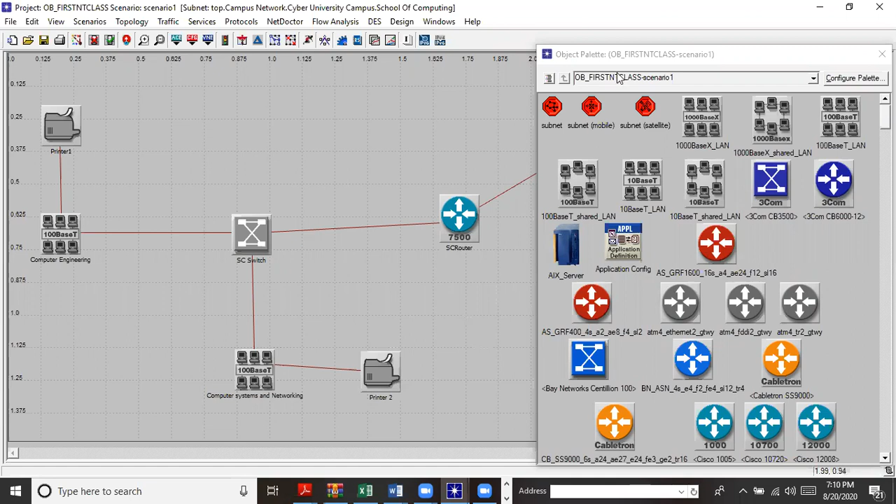So I said we are going to add servers. I'm going to put one server in each subnet, and we're going to put all the servers, meaning if you've got 7 applications, we're going to have 7 servers. In IT, these other applications access applications remotely, but we can have the database local. Database will be local, and print will be local, and the rest will be accessed remotely.

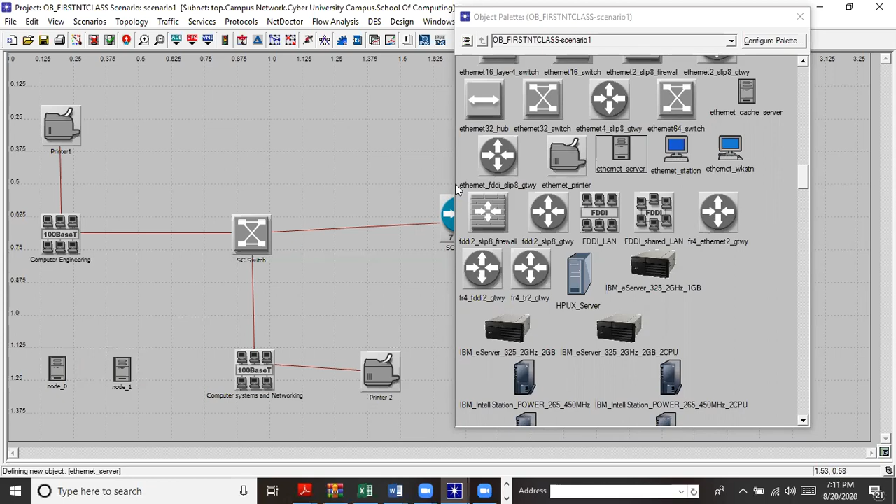So let me put the Ethernet server there. I'll put 2 servers there. Then even here, I'm putting 2 servers even there. In IT, I'm putting 7 servers. 1, 2, okay, like that.

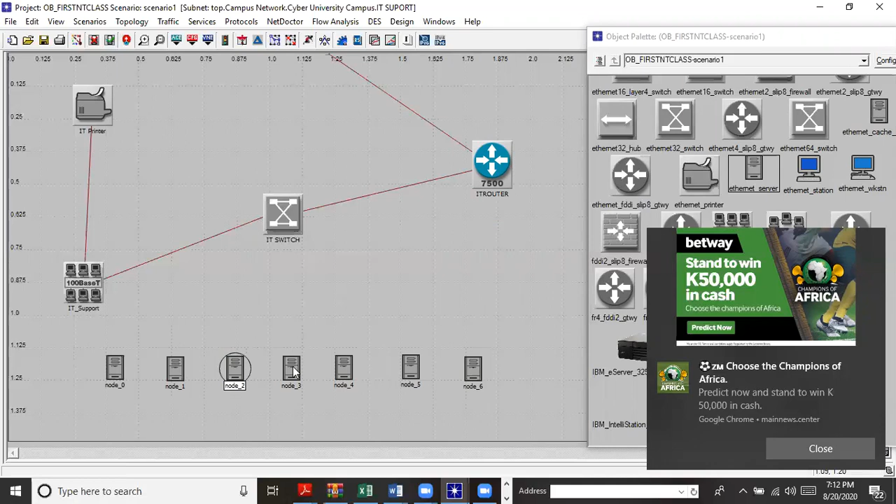Mr. Brian? Okay, so what if in the coursework you have one server and then you've got, let's say, virtual machines running just on one server, but you've got many virtual machines running on it. Is that still possible in the coursework, or would you have to have separate servers for each service?

No, it's up to you, because we've got bigger servers where all the applications can be configured. But we can argue, what if this one server fails, meaning there will be no applications running? The fact is we know there are bigger servers using redundancy, even power supply, isn't it? Yes, they'll never be off.

So it's okay, you can put one if you want, but you justify that this server is on redundancy, so they shouldn't worry that it is down. You can never not have redundancy. Even the links can be redundant. We'll talk about all those.

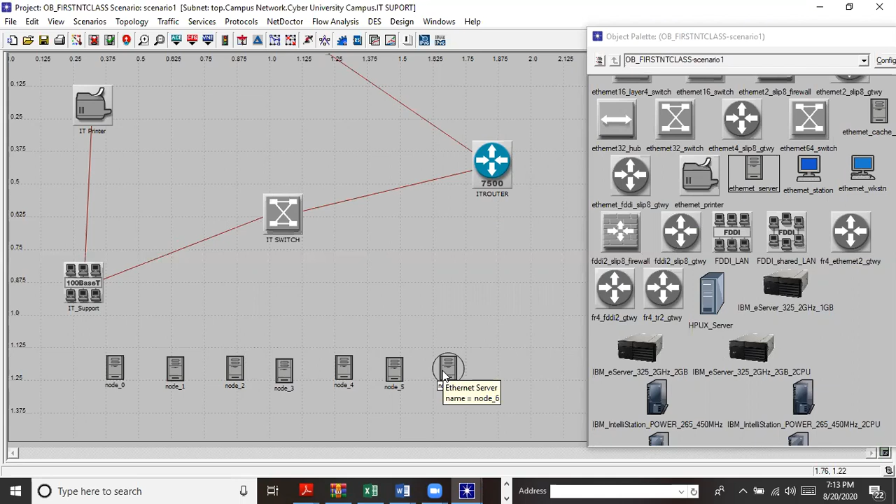Okay. People are submitting to NCC, they are submitting assignments. No wonder they are calling a lot.

Okay, so I just wanted to show you this other way, but the easiest one will be you just put one server and all the applications will be configured into that particular server. But personally, I can say I'm not going to have one server because of this. You give reasons, you need to justify your design. It is your design, so you need to justify it at the end of the day.

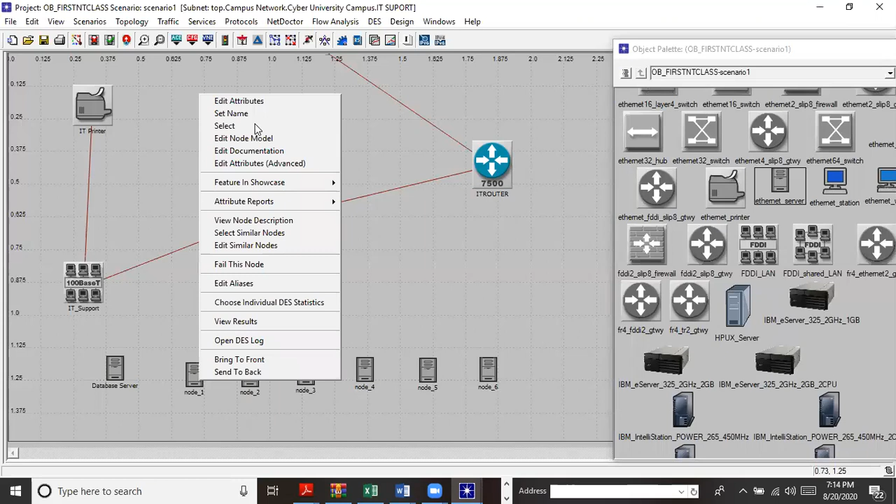Okay, so I'm going to rename these servers. This one will be database server. Then the other one is email server. This is FTP server. Print server, voice, then video conference, then telnet. No, this one doesn't need a server.

Okay, so these are the servers that we have. The design is yours, so don't worry how the arrangement will look like. You can design it the way you want it.

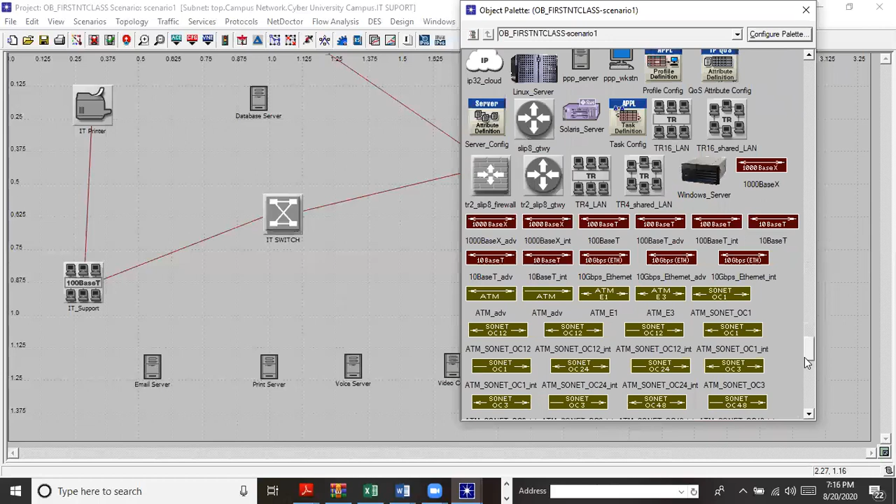Then I'm going to connect this using 100 BaseT. 100 BaseT is there, where is there? That's 100 BaseT. Then you connect these servers to the switch. Yeah, connect.

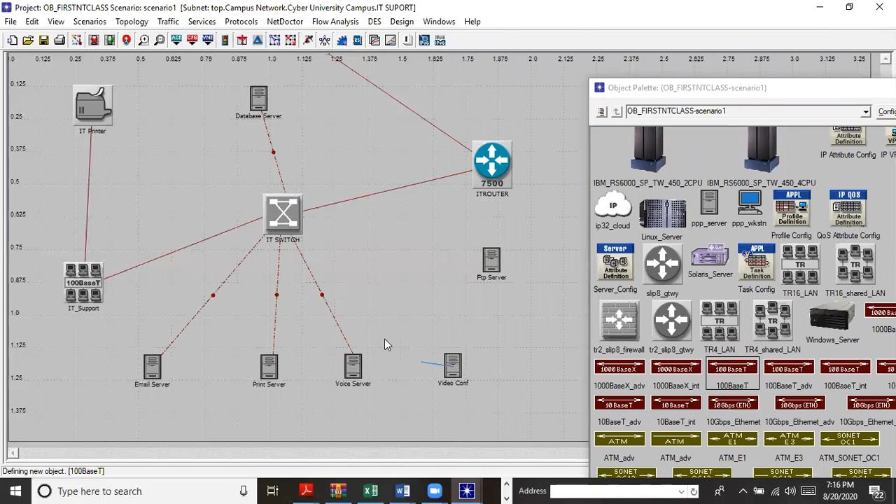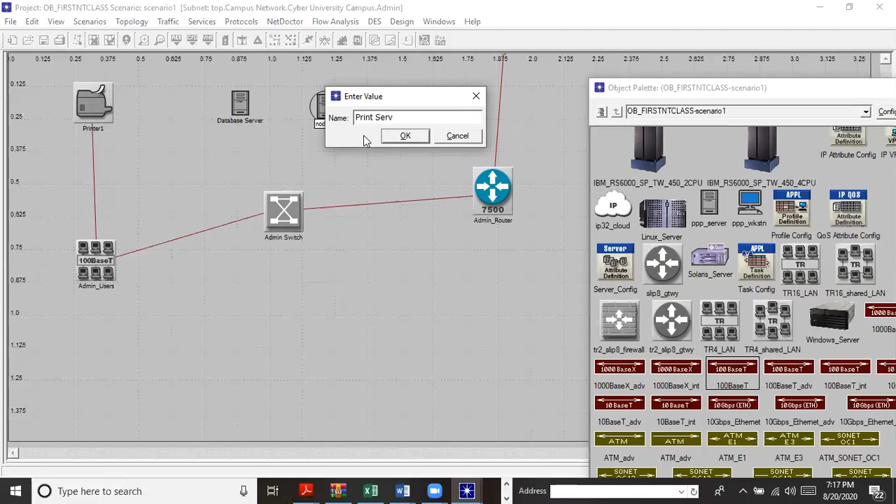So I've connected these servers. I've connected this server. Then I'll go to admin, where we have the database server will be local, server will be local, and the print server will be local. Then you get 100 BaseT, you connect these servers.

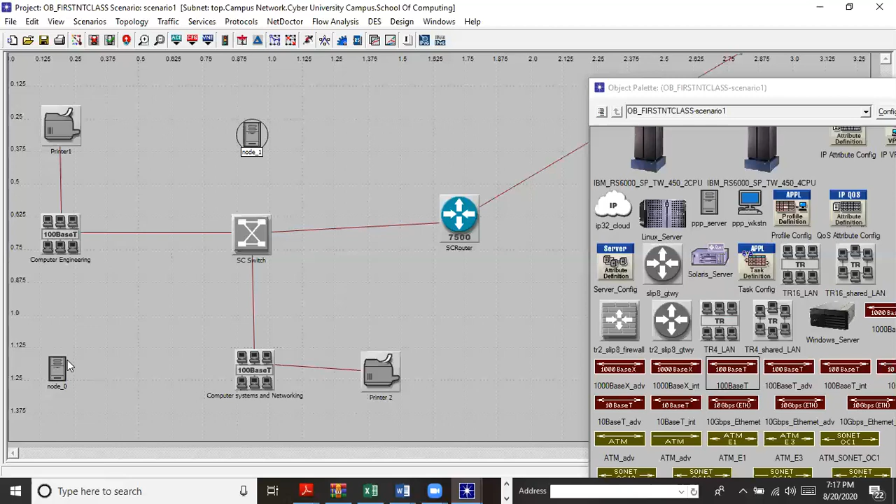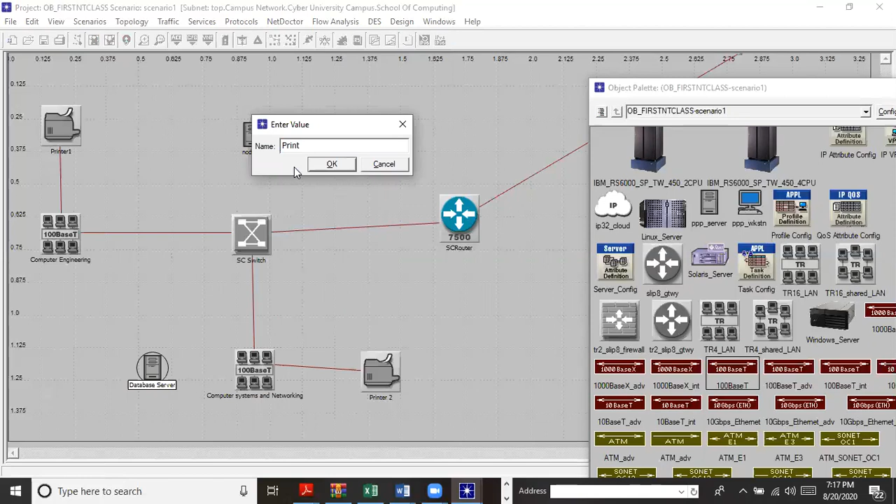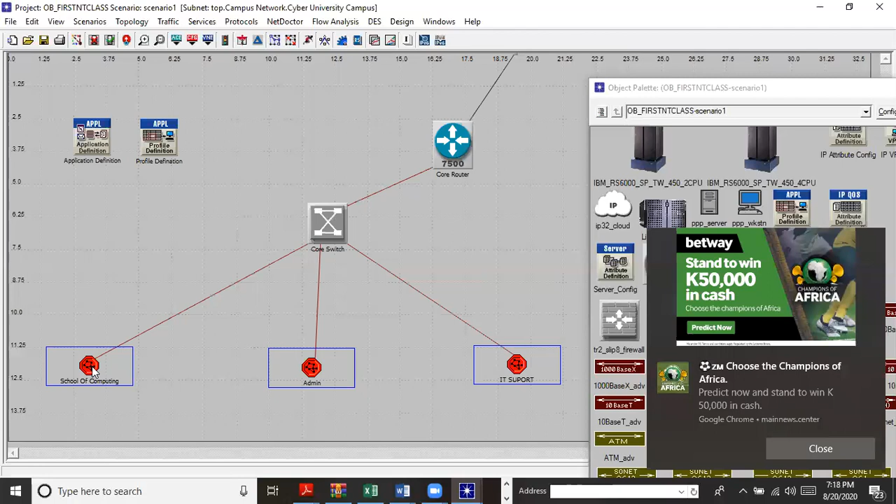When you go to School of Computing, also we have these two servers, database server and a print server. I noticed that we don't have the printer there. Okay, it's okay, alright. So we just...

Sorry, I've got a question. From the local switches, how do you connect them to the core switch? In this case, remember in each line there's a router. So this is a router, this is a router which is connected to the core switch, not a switch. Oh okay, yeah, not a switch connected to the core. Yeah, so that's how it's supposed to be.

So if there's a mistake, how can you reconnect the router to the core switch? You just click on the link like that and click the delete keyboard button. Okay.

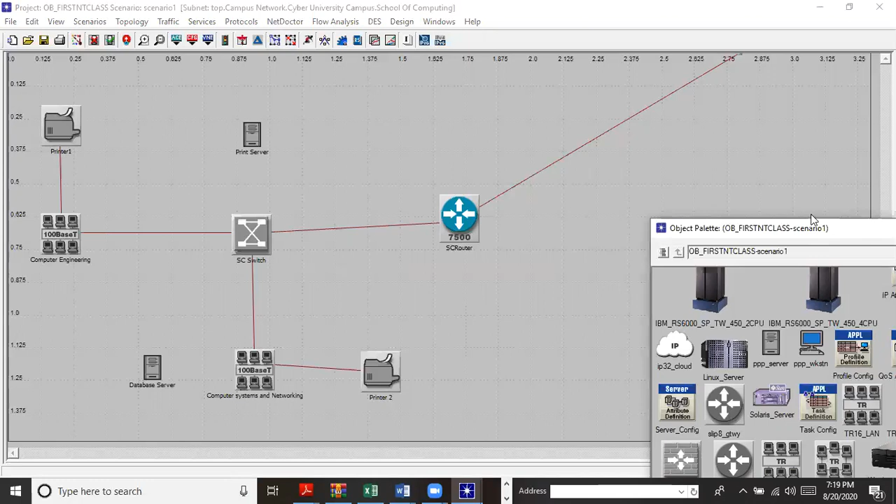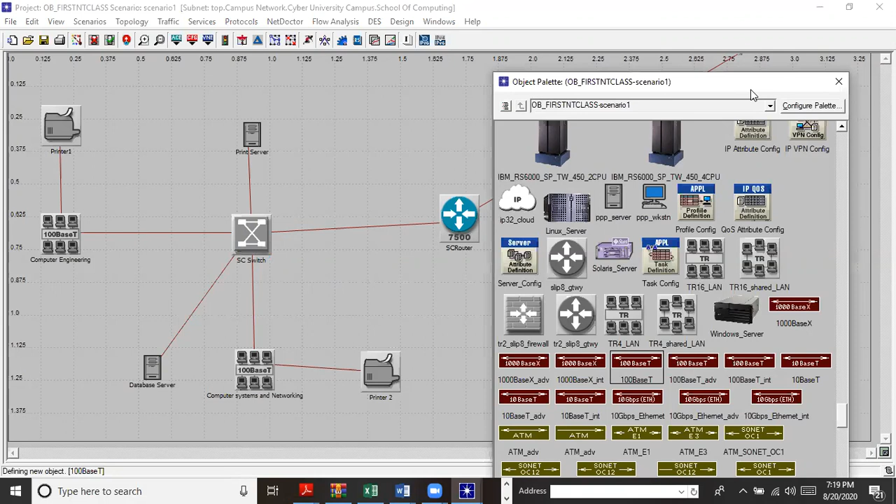Okay, so I'm just trying to connect these two servers to the switch, to the core switch. Okay, so now you should pay attention. I'm starting configuring these servers, right? I'll start configuring them.

So I'll start with the database server. You right click, then you go to edit attributes. Then you go to applications, then we'll start with the application supported profiles. Where is that server located?

Okay, just a minute, let me answer this one. Hello. Hello, good evening, yeah. No, it went off, send this, reconnect. Yes, yes.

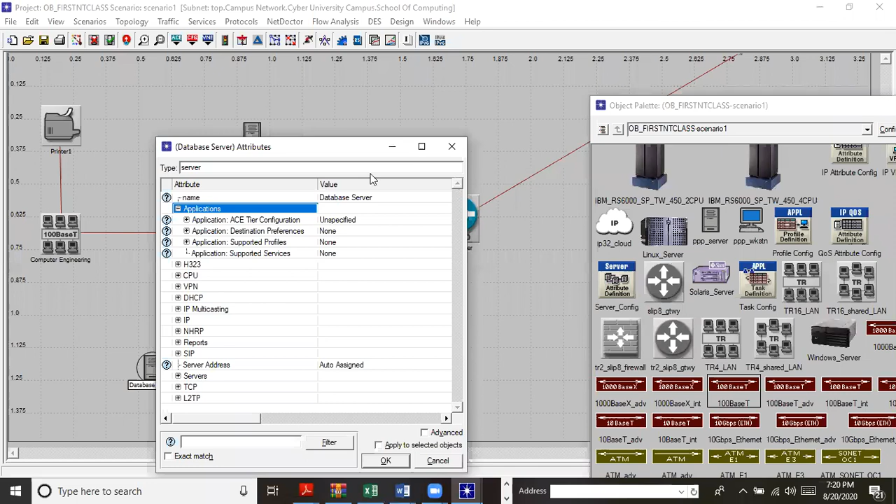So when you look at this server, it's in the subnet called School of Computing. We are in the subnet called School of Computing. Have you seen? Yes. So where it says application supported profiles, where it says none, you click on none, then edit.

When you click on edit, this pop-up box will appear. Under the profile name, we have 0 rows, just click on 1. Once you click on 1, under profile name, under the none there, you just click the none, then the types, the profiles will appear. Click on it, School of Computing.

So meaning that this server is supporting School of Computing. This server is supporting School of Computing. Then you click OK. Then you go to supported services.

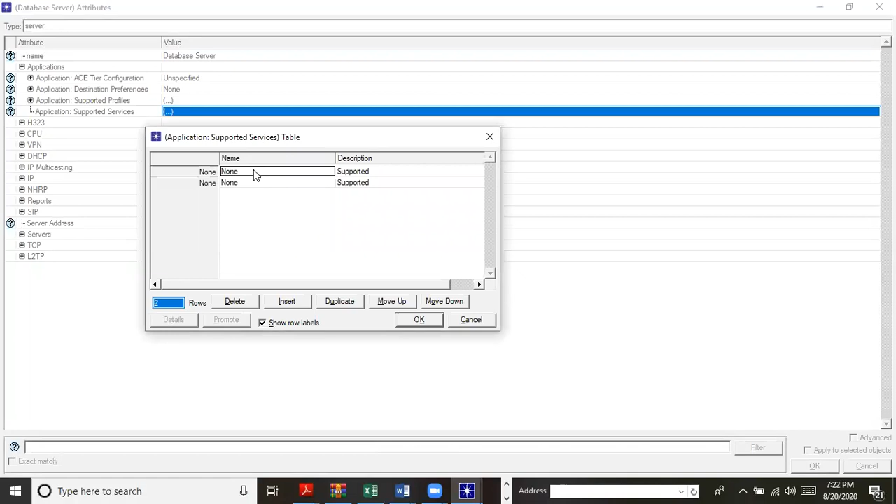This database server is supporting 2 services. Then under 0 rows, you click 2. We are going now to get those specific services. It is supporting database high load and database low load. Then you click OK. So we have configured this server.

We have configured this server. So we also go to a printer server. You edit attributes. You go to applications, supported profiles, you click none, then edit. The supported profile is only 1.

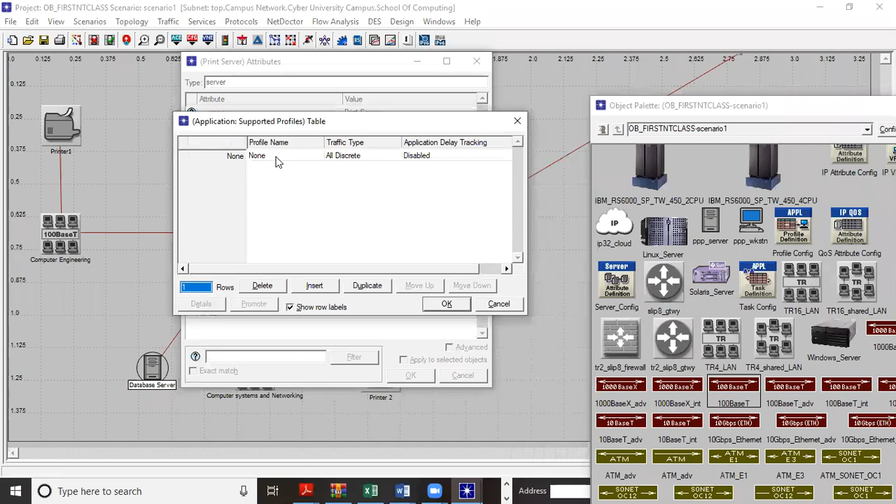Then you change it to 1. Immediately, the row will appear, and click none. We are still in School of Computing. Click School of Computing, then click OK.

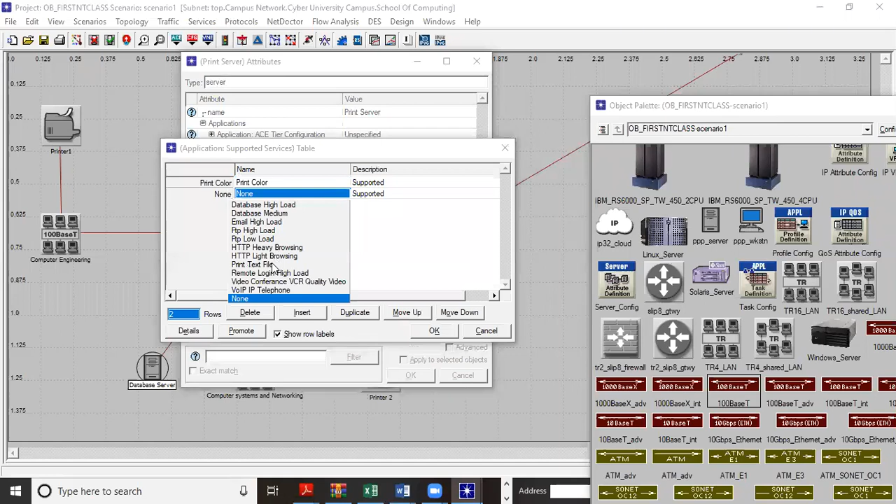Then supported services, you edit attributes. We've got 2: print color and print text files. Then you click OK. So we have configured both servers.

Now we are going to configure the users. There are types of users: those in computer engineering and those students who are in computer systems and networking. We have to give them the types of applications they are going to use. In this case, they are both students, so we are giving them the same applications.

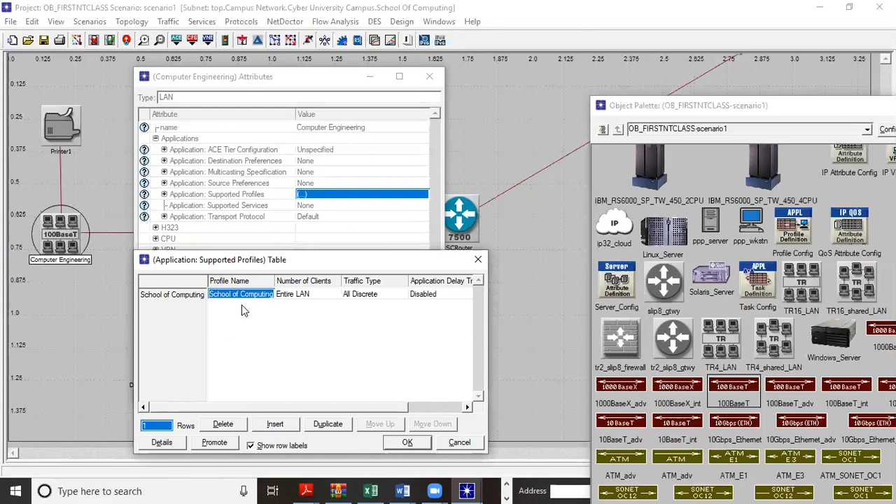So just right click on the users, edit attributes, then go to applications. Supported profiles, edit attribute, it's 1. We are still under School of Computing. Then supported services: how many services do you want computer engineering to be using?

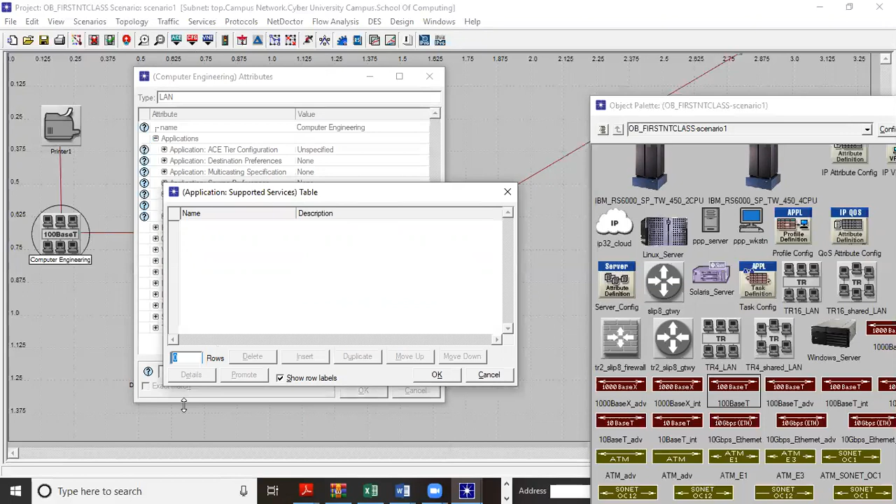We've got database, FTP, HTTP. Let's give them 5. Click 0, edit, then just type 5. Okay, so we have such applications. Then none, you click, we are going to get them configured.

Database, we give them medium. Email, we give them high load. FTP, we give them high load. No, low load, file sharing, light. HTTP, I've already put. Did I need printing services? Then give them black and white.

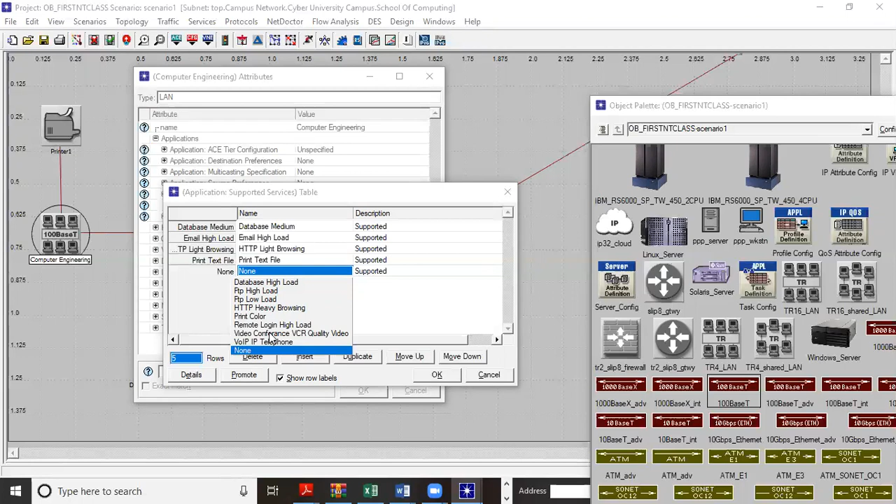Then let's give them, what else can we give them? Voice - we give them voice, right? So we give them that. If you are writing, you can even write that computer engineering services, you type these, you write these services. This is what makes documentation.

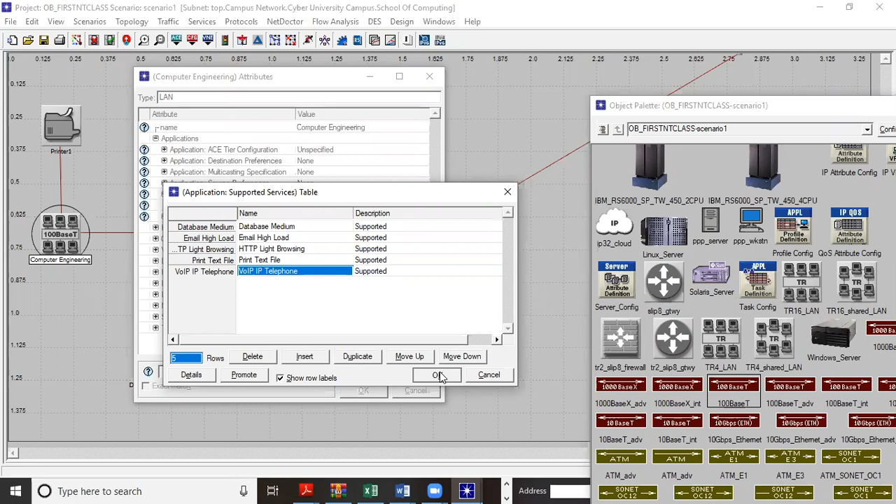You will see as we are going on, then you click OK. Then, how about file transfer? File transfer - there was no FTP. No. We can go back, you see now?

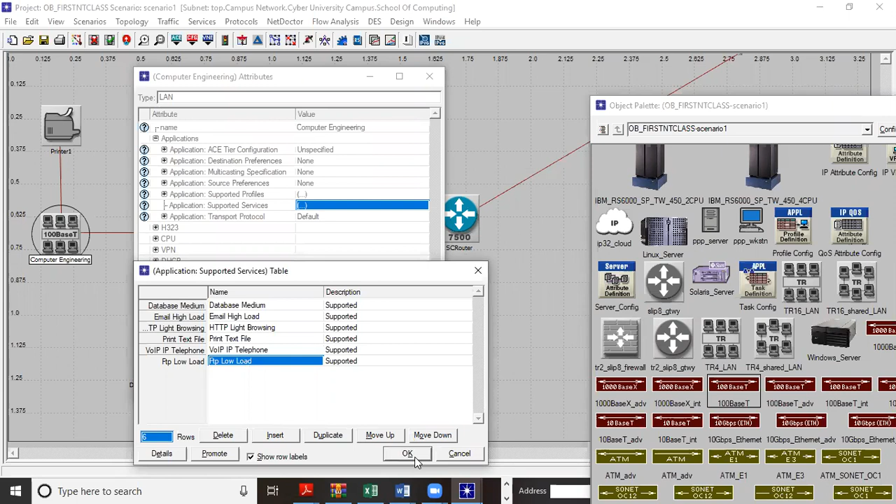There's no file transfer. Okay, so we can add another row, to 6. So we give them - can be - okay, I've given them low load. I've given them low load. Then you click OK.

So we are saying we have given this type of users such services. We can justify why we have given them those services. Then you click OK. So we have configured that LAN. There are 2 LANs in here: local area network for computer engineering, and local area network for computer systems and networking.

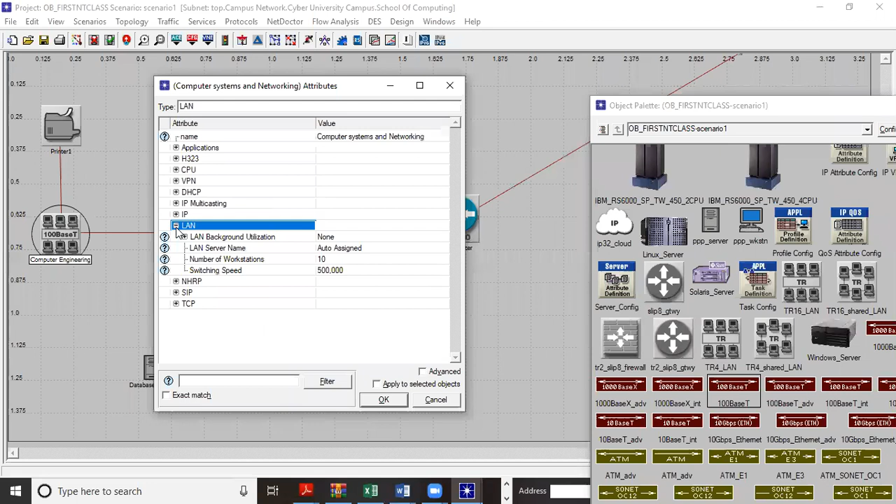So now let's configure computer systems and networking. You right click, you go to edit attributes. Then, by the way, I forgot one thing: where we say how many users or how many students are in computer systems and networking, you go to LAN, the number of workstations, I say 25. You don't need to have 25 workstations, just so the place isn't crowded - just the traffic itself. You just go and configure it into the settings.

So once you say 25, meaning that the traffic is as of those of 25 users. You don't need to have 25 computers - just when you change in the settings to 25, meaning that the traffic is equivalent to 25 users. Then you go back to the applications. We are still in School of Computing.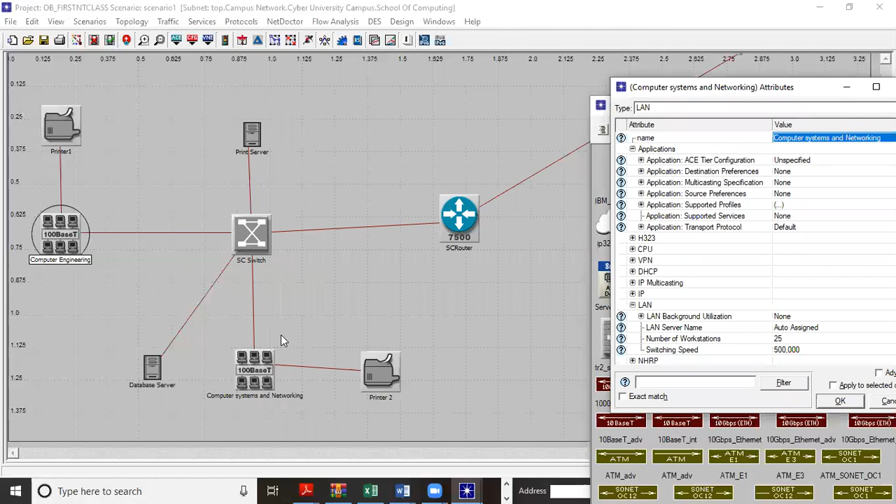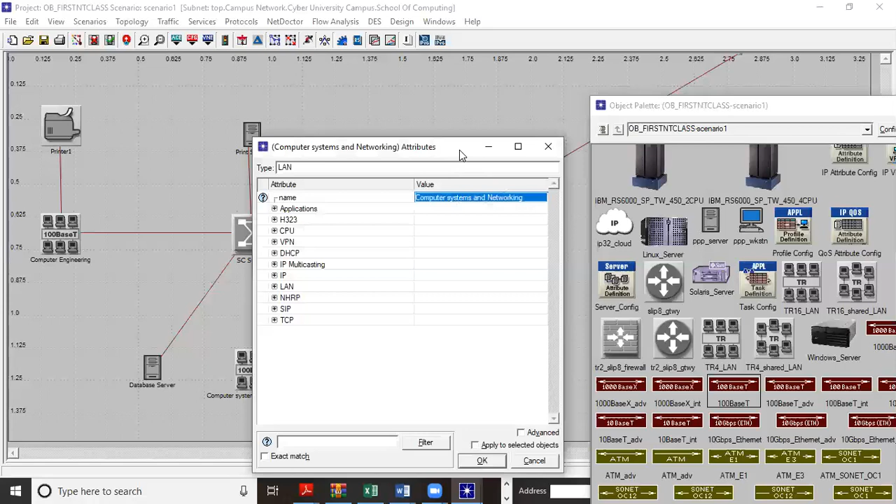Yes. So if I say, okay, in computer systems and networking I need 25 computers, you just have to right click, then go to edit attributes. Under LAN there, you can see LAN. You just elaborate it, expand it. Then we have LAN background utilization, LAN server name, number of workstations.

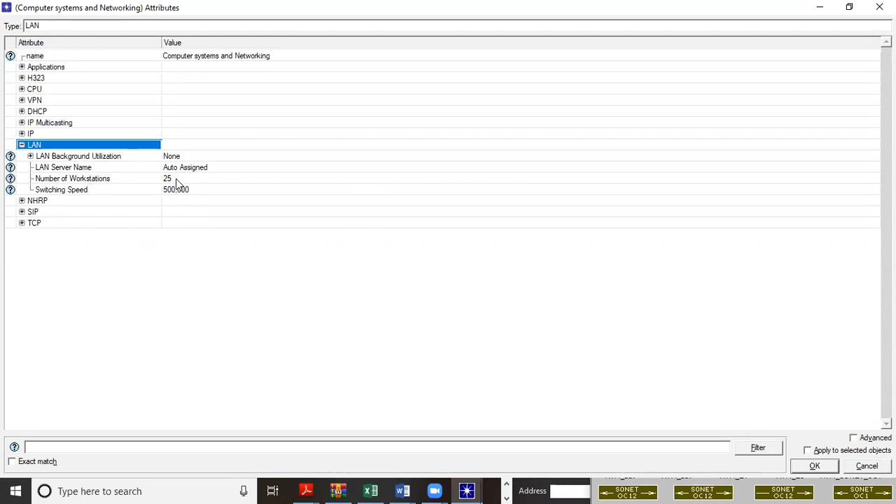So go to number of workstations. You just click on the number there. Then when you click, we've got 5, 10, 25, 50, edit. Meaning that edit like that, you can put any number that you want. If I want 30, I type 30, then go back there. So meaning that local station, that LAN, even if it's showing 6 computers, there are actually 30 users.

So when you configure like that, when we are marking the courseworks, we can actually go there and check if you change the number of workstations. So hope you won't forget. Okay, you're welcome. So now we go back to the applications.

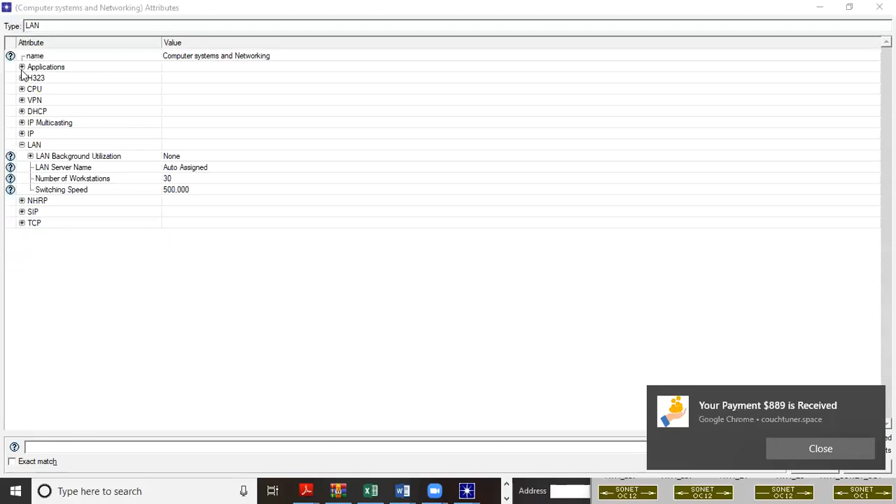We've already configured supported profiles, where we said this School of Computing. Then you go to supported services attributes. Let's give them 6. Edit, then type 6.

This time, okay, I'll get database medium. I'll get email high load, FTP low load file transfer, HTTP browsing, print, then video conference.

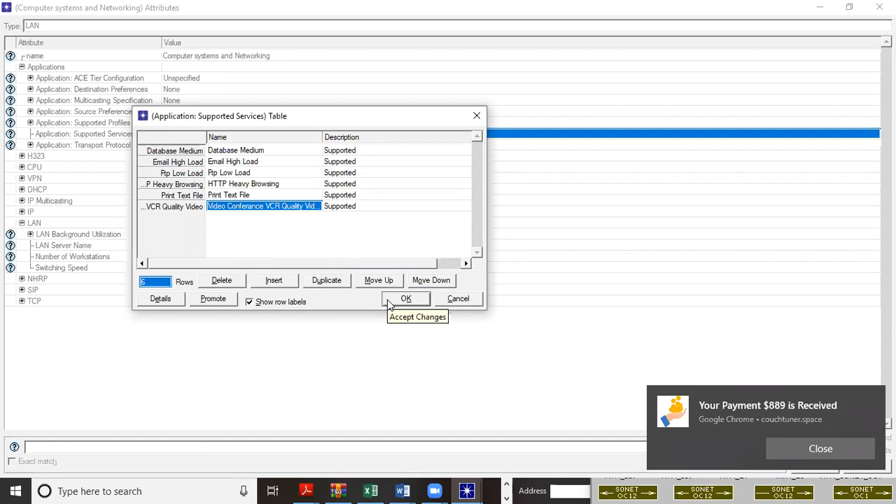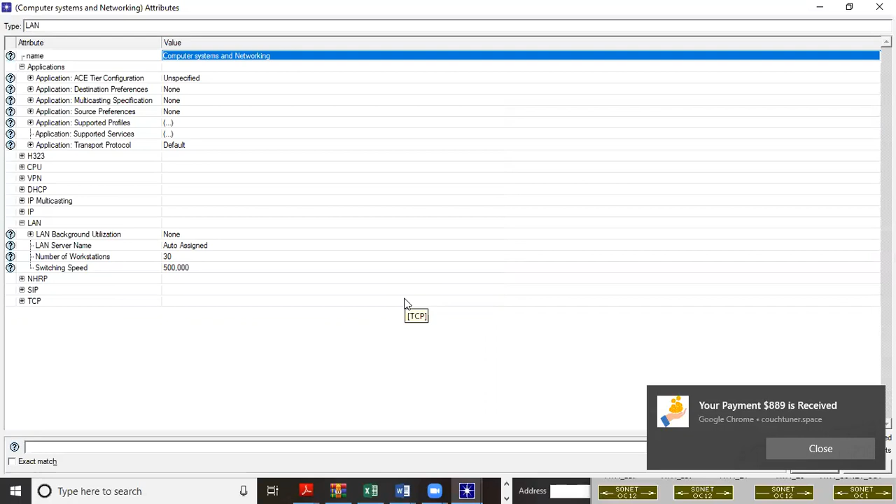Okay, come in. So when you do that, you just click on OK, meaning that the local area network, which is computer systems and networking, we have given them those applications, and we have given the number of workstation to 30. So we are saying there are 30 students, meaning that per computer, per station, there's one student. Then you click OK.

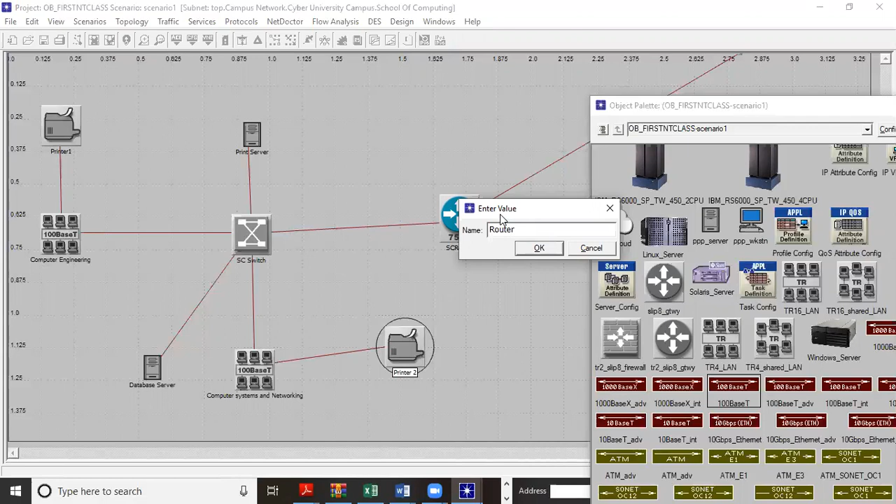So this LAN, we have configured. We have configured this LAN. Okay, we have configured this LAN. So we are going to another LAN. We do the same. We are going to another LAN. We do the same.

I'll get out of this subnet. Go to this parent subnet. Then I go to admin. Let's hope you are following. Tell me if you are lost. Anyway, you have a recording.

You have a recording. Watch this recording, understand each and every step so that you can start designing your own local area network. I want by the time courseworks are coming out, we don't have any issues. You just start doing your own things without even troubling yourselves. We just go through together the courseworks, we look at the requirement specification, and then you are good to start. That is when the courseworks are out.

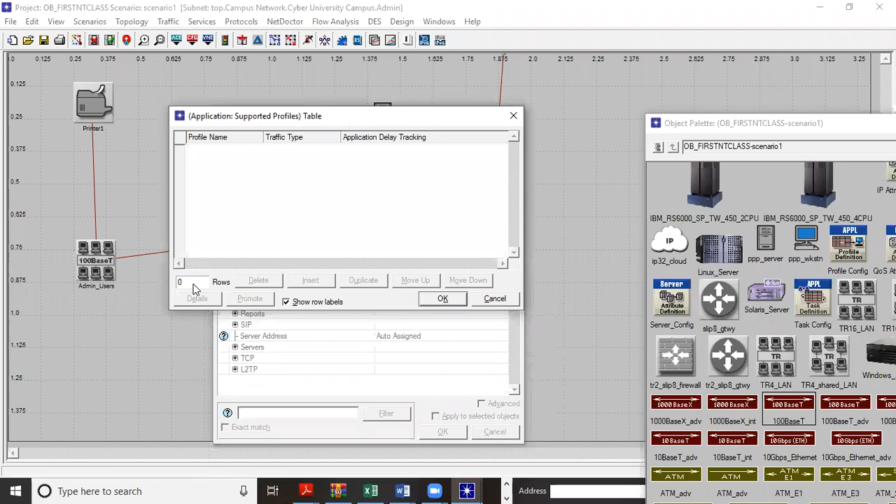So let's configure database in here. We are in admin now. So click application, supported profiles, click on none, edit, this box will appear. Go to where it's written 0, click there, then pick one, then none, click on none, then select admin, then click OK. So we have attached admin to that server.

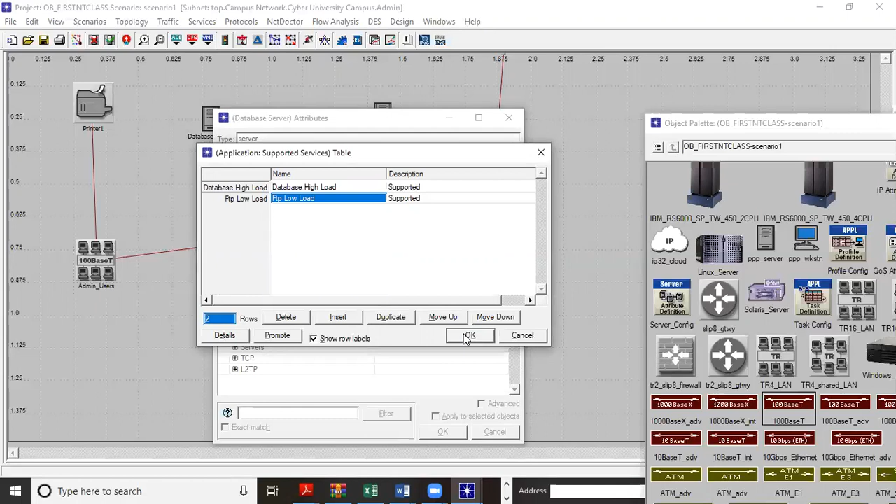Then go to supported services, click on none, edit, number of rows. We are on application, right? Let's pick 2. We said 2. We are on database. So we said database high load and FTP low load. Database high load and FTP low load. Then click OK.

Right. So we are done there. Then we go to the print. We do the same. Applications, supported profiles, edit. Still one. We are in admin, so we pick admin.

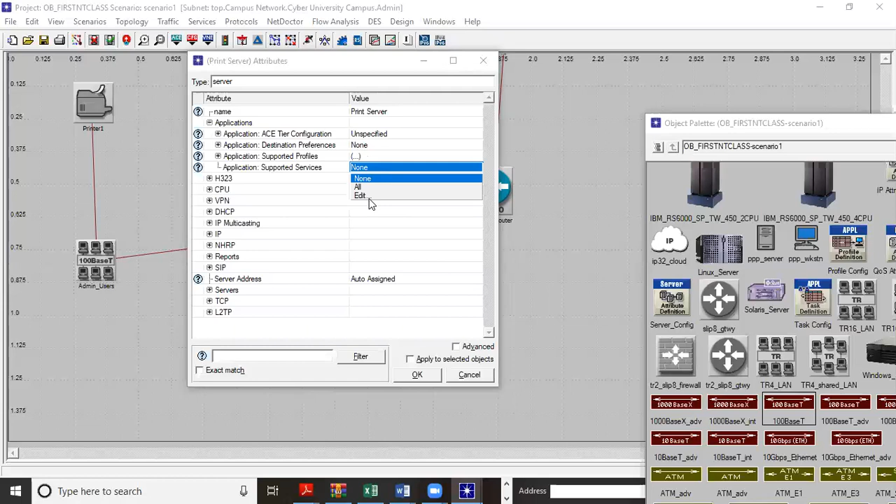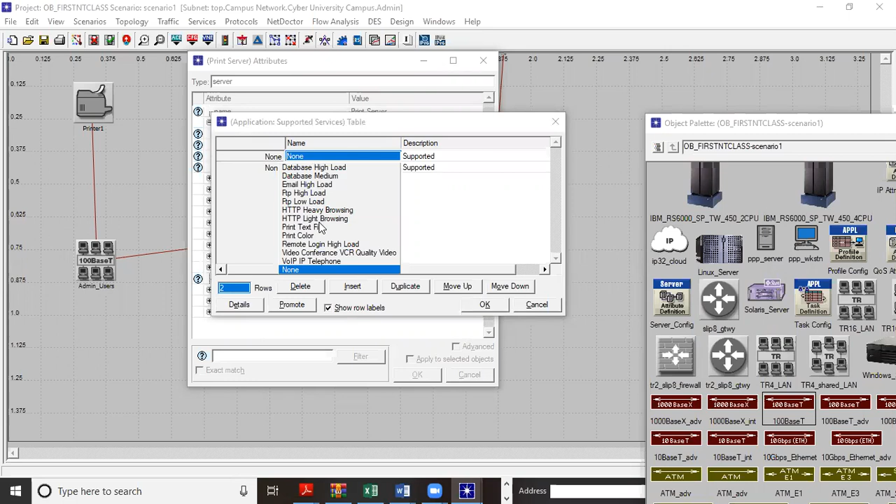Then edit, add, then you go to edit. We are entering services. There are just 2 services, by the way. There are just 2 services. There is print text file and print color. Then you click OK. Then we go to the users now.

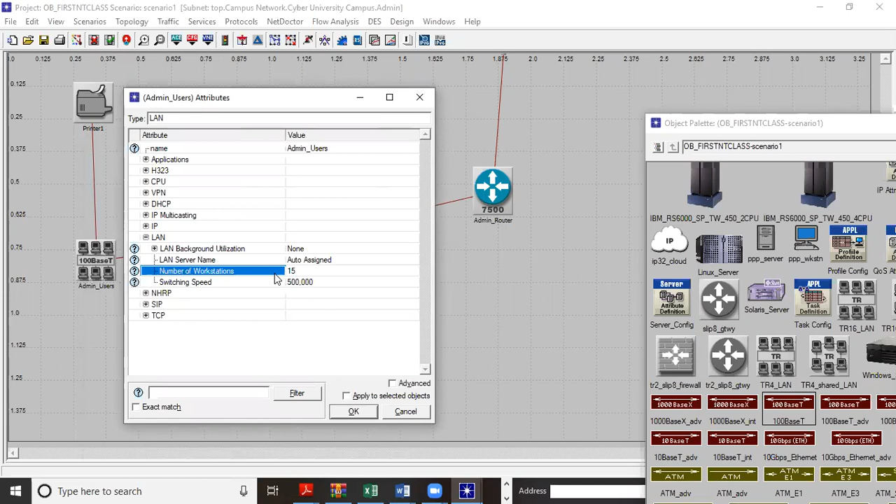We configure the users. So we start with LAN. I can say users, we've got 10. Let's leave it. Now let's give it 15. So type 15 there. Type 15 there. Then go to application.

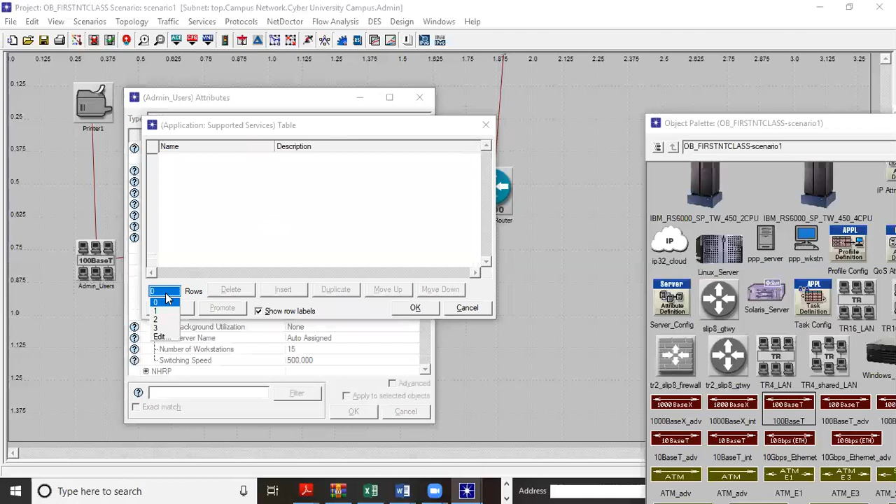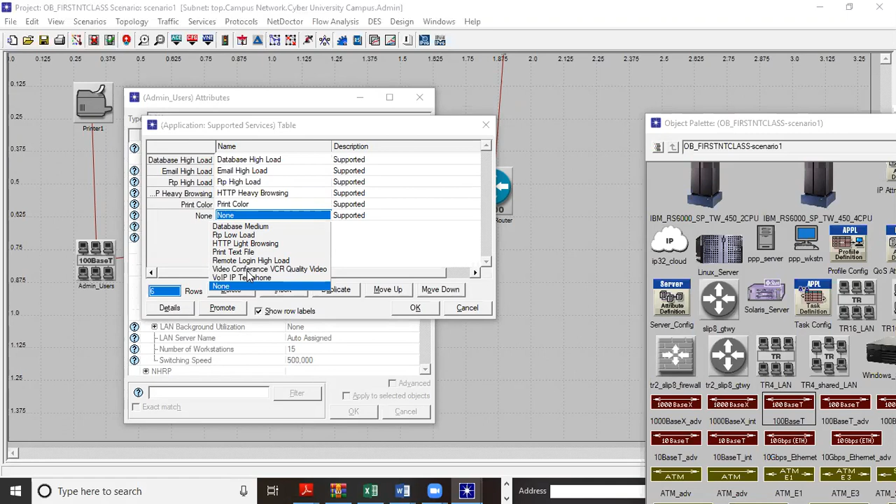Application supported profiles. It's 1, which is admin. Then supported services. Let's give them 6. Let's give them 6. Okay, so we're going to have database high load, email high load, FTP high load, HTTP browsing, print color, then VoIP, I mean a video conference. Then you click OK.

So we have configured this LAN. I think I remained behind. Okay, where? I was still entering the supported services.

Who is this one? What's your name? Emmanuel. Oh, Mr. Emmanuel, you are configuring. I said at least first follow what we are doing, then you can start practicing on your own after this one.

Anyway, you will still follow because we are now going to configure the last one. This one has got many servers because it's supporting remotely those two LANs where we are coming from. This is more like the IT.

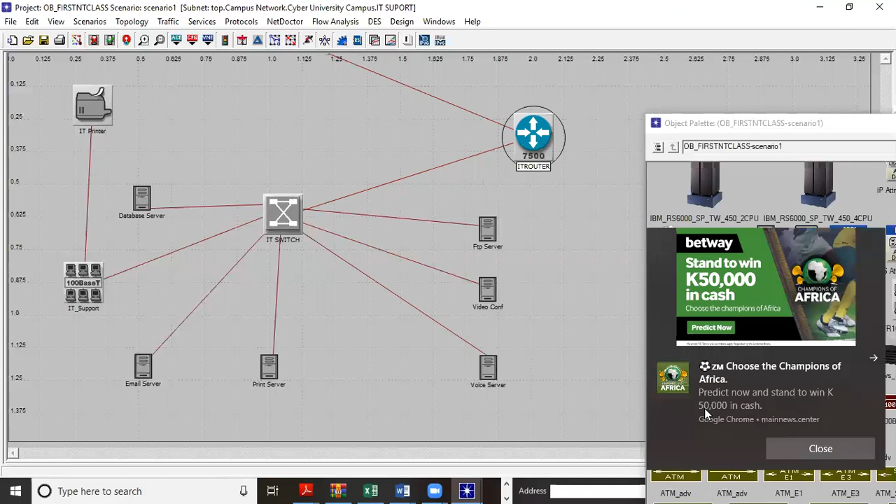This is IT, this is where everything is done. I'll start with a database. Start with a database. Let me configure, we are in IT.

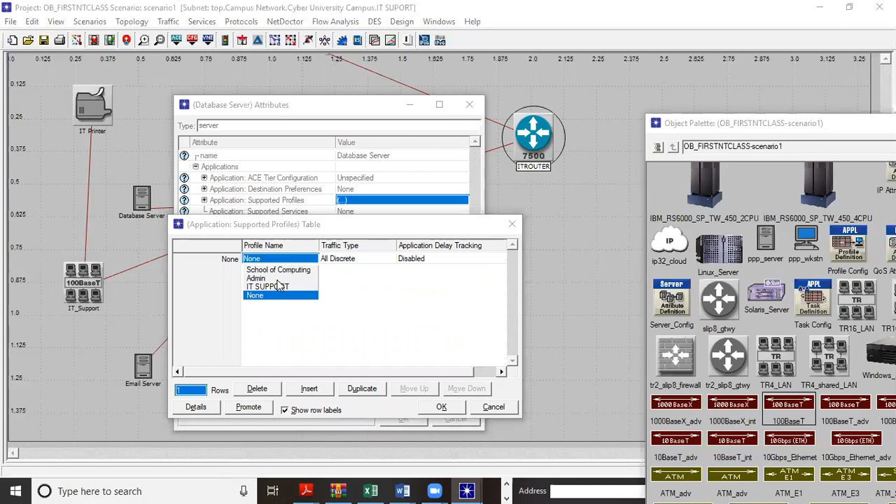IT, we don't need a lot of users. Let's go to application first, then database, edit profile. This database is only supporting one profile, the IT. And supported services, also just two.

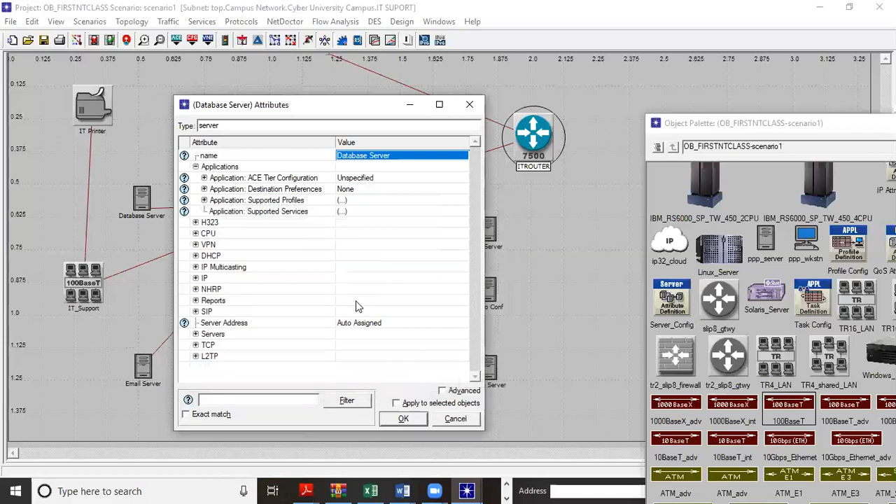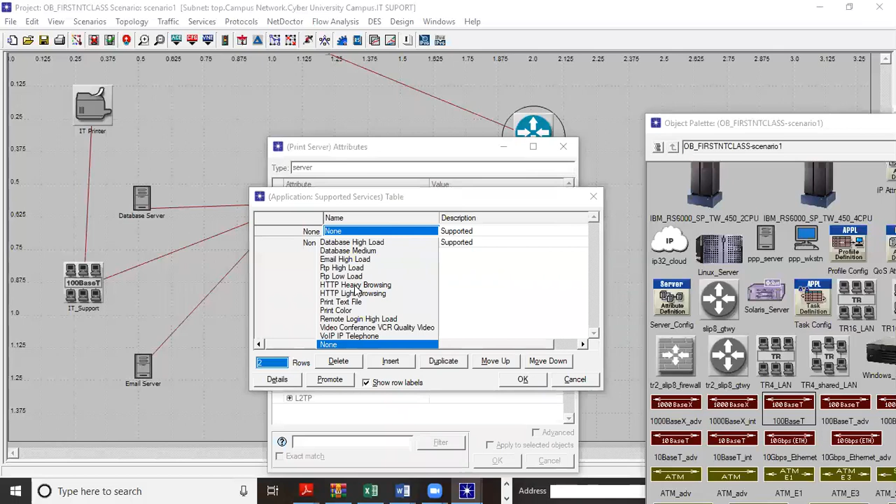Just like the rest, this one we consider as local as well. It is just local also. And when we go to print, also just like the previous ones. So meaning that supported is one, which is IT. And the services we said two: either black and white printer or text files.

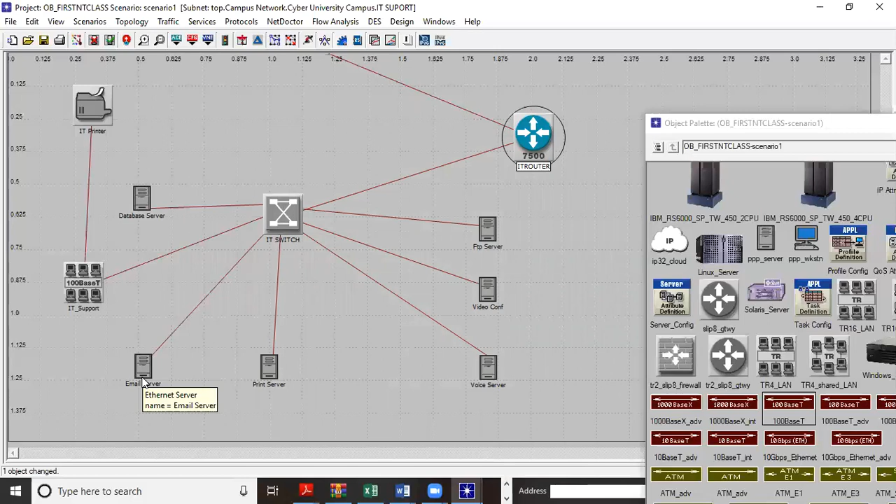So now let's go to email and see what you change. When we go to email there, supported profiles, it's 3. Can someone explain why it's 3? Is it because there's high, medium, and low?

No. Profiles, because there is the IT itself, admin, and School of Computing. Those are the profiles. You get it now? Because those other profiles, they are having email services remotely because of this IT department. It is the one supporting them. No wonder we don't have the email server in admin or in School of Computing.

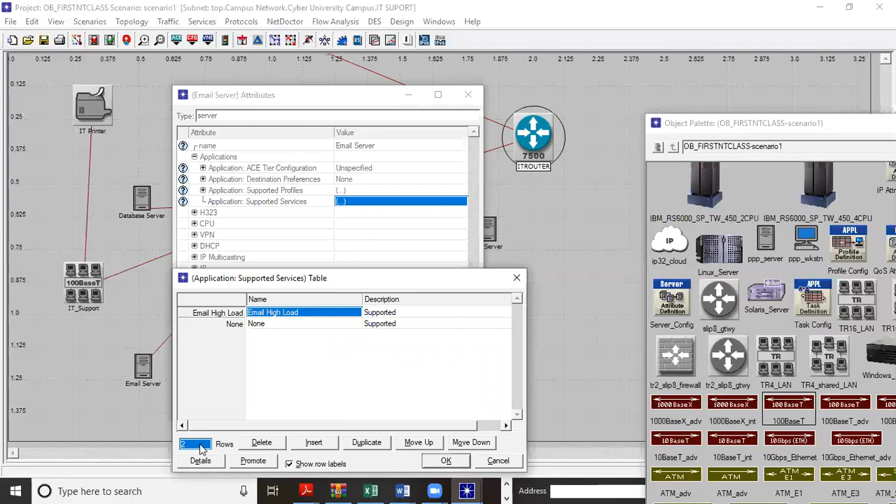Hope you get it now. Are we clear? Yes, okay, so we are going to say profile names: School of Computing, admin, and IT support. Click OK. Then supported services, we say 2. This is where we have email, high load. Actually we just have 1. Then the FTP server also.

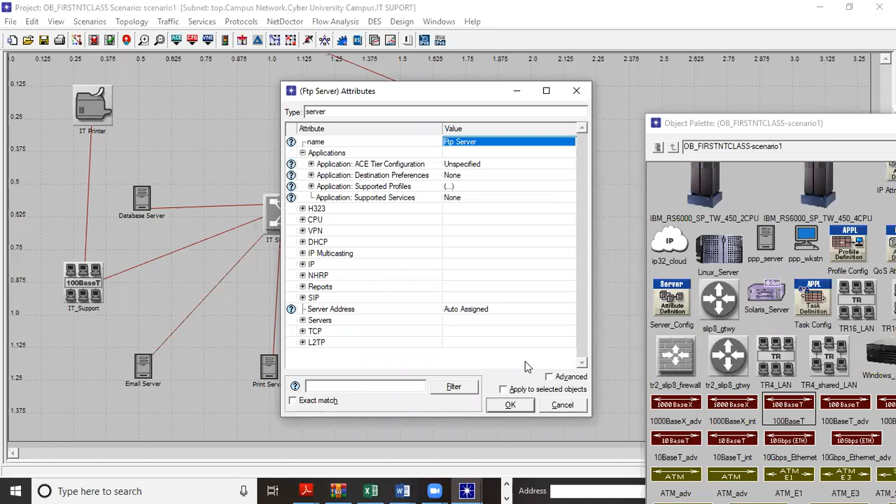Profiles, it's 3: School of Computing, admin, and IT support. And the services, it is just 2, those 2 intensity we gave, which is high load and low load.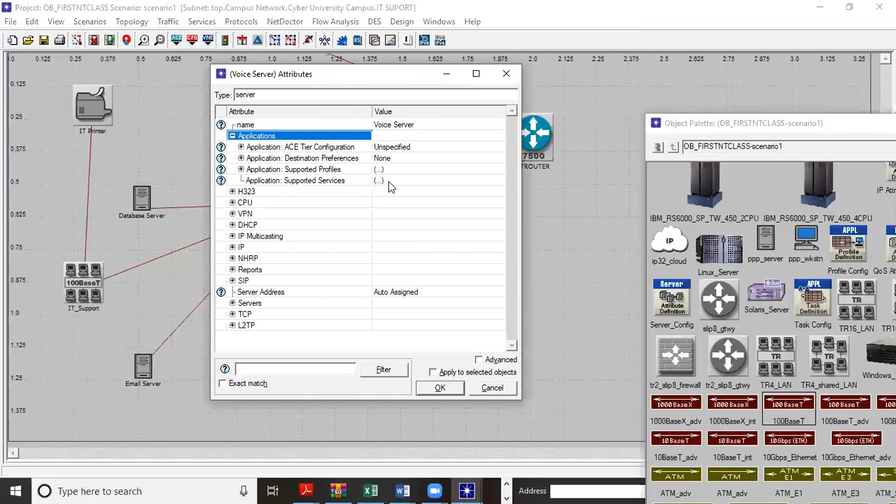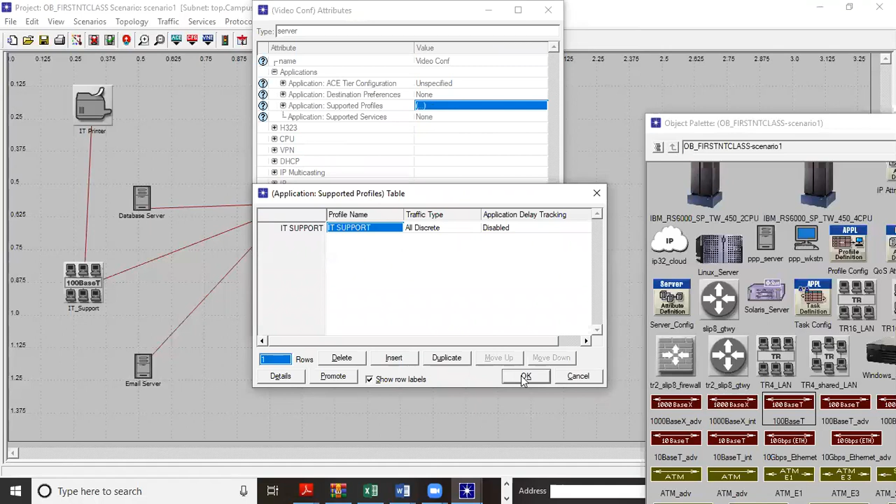Oh, that was voice. No, that was voice. It's voice. Then that's when we go to video now. Supported profiles for video, it's just 1. We don't have video in those 2 profiles. Then it is also 1, which is video conference, VCR quality.

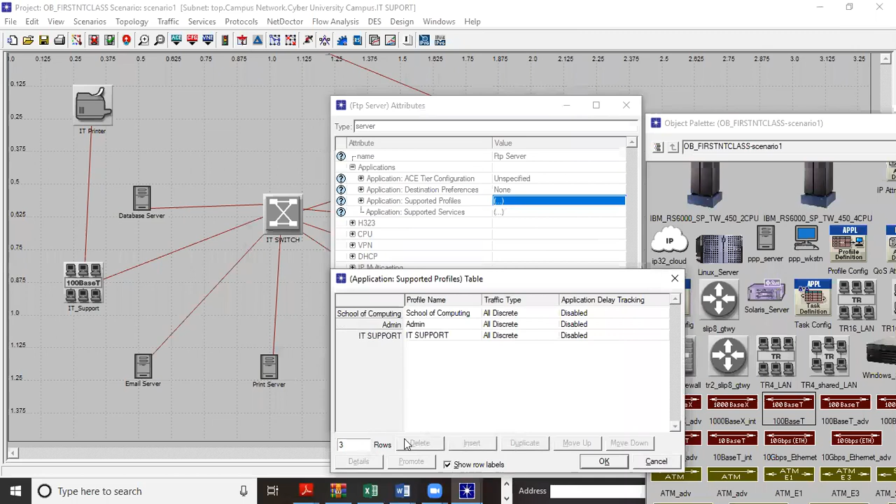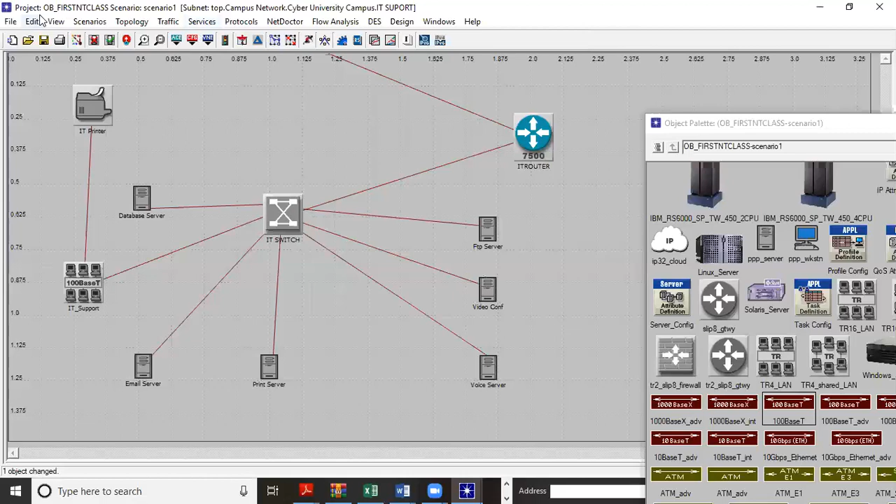FTP server, this one, the profiles, supported profiles. Okay, we did this one already. So we have configured everything. Then remember to save the configurations.

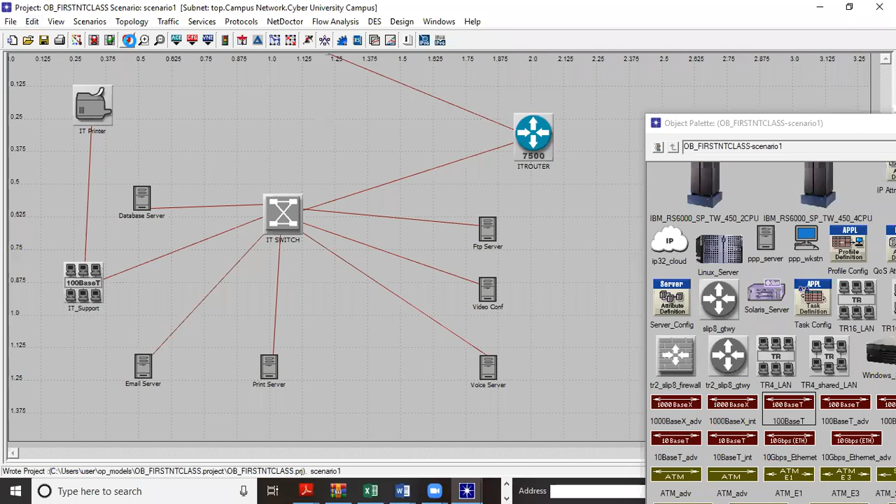We are done. We have configured, we have designed and configured the network. Like this, the network is up and running. Any question?

I'm supposed to run this, but running will take a bit of time. So today I've ended on this part, but I'll show you how to run. How do we run now this network?

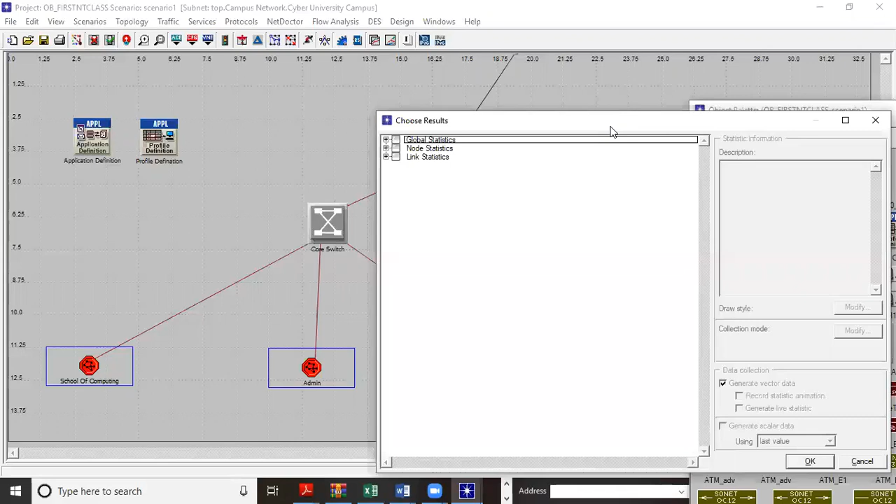You have to right click on an empty space, then go to choose individual statistics. When you choose individual statistics, we have results from global statistics, node statistics, and link statistics. Let's say if I want to measure a link, I'll just go to link, then point-to-point link, then I can get a queuing delay.

I want to know the queuing delay. We have the queuing delay inbound and outbound. This is the outbound. On the other side, the description says this statistic represents instantaneous measurements of packet waiting times in the transmitter channel's queue.

Measurements are taken from the time a packet enters the transmitter channel queue to the time the last bit of the packet is transmitted. That's what queuing delay means - queuing delay from the network. This is where a lot of students don't get it. They don't understand what queuing is about, and there are even write-ups according to what you have picked.

So you have to know what queuing delay out of the network is, and we also have queuing delay inbound, which is the same. Then we have throughput - this statistic represents the average number of bits successfully received or transmitted by a receiver or transmitter channel per unit in bits per second.

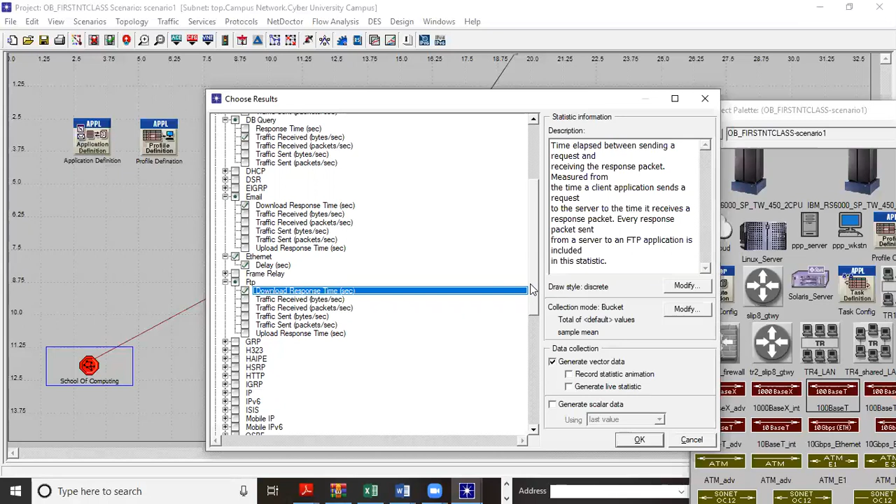Time elapsed between sending a request and receiving the response packet - measurement from the time a client application sends a request to the server. So I can also get FTP. You just tick what you want to be collected, then print traffic received bytes per second.

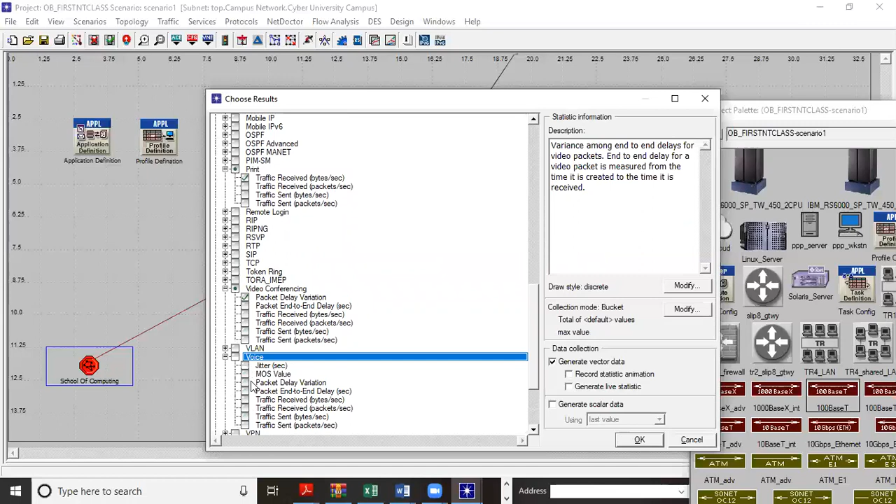Then video conference, I get packet delay variation. Then voice, I get packet delay variation or packet end to end. Then once you click OK, meaning you have selected what you want to collect, then you go to where it says configure/run discrete event simulation, DES.

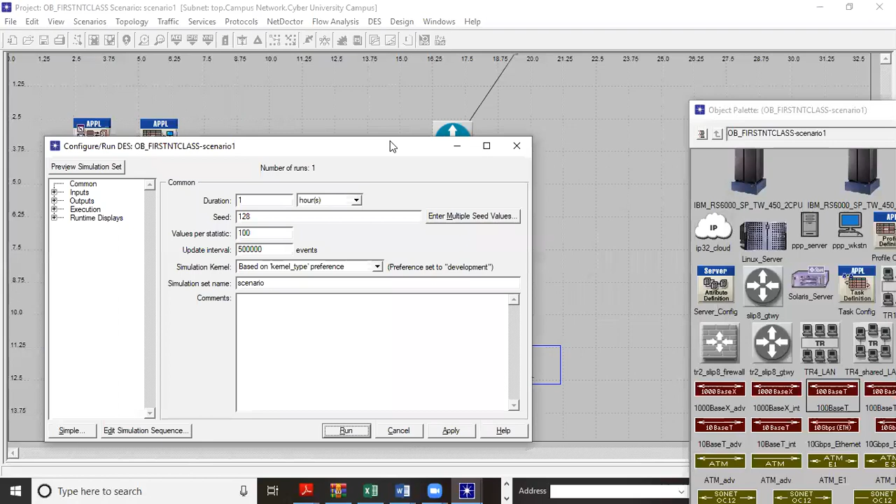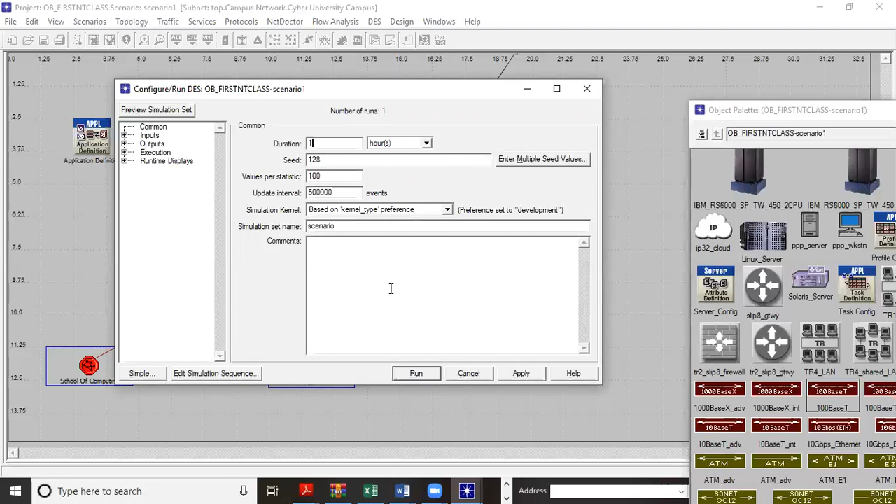Then you click there. Once you click there, we have this config run DES - albeit it's the name of our network we're designing. Then the duration should always be 1 hour, because you can't collect anything in minutes. Make it 1 hour - for me it's 1 hour. Then you just click apply, then run, and the network starts running.

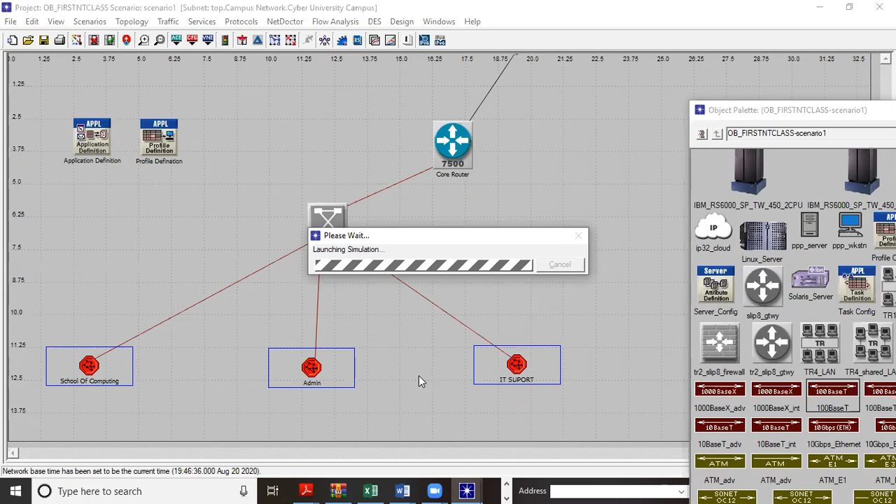So that's how it runs. The network is okay, everything is fine - we've configured without any errors. So as you can see, my network is running now. It is collecting the traffic so that we can give the analysis. This is where now the graphs come in - those graphs you see, this is where they are now coming in. After this part, we'll start collecting.